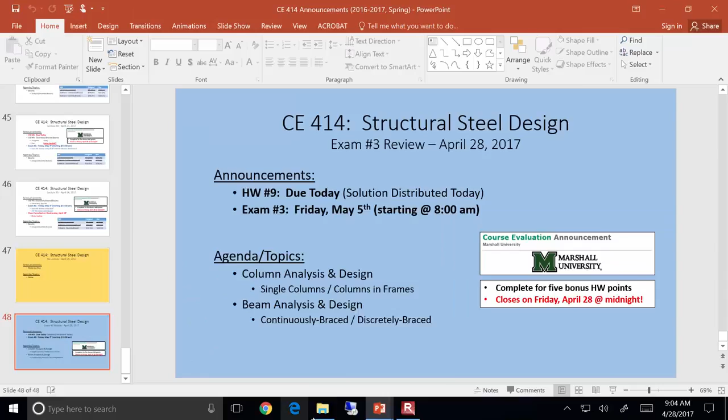Okay, so does everybody have a copy of the Homework 9 solution? If you have not turned it in yet, you need to do that now. I am going to go through the solution so that everybody's aware of what's up. All right, homework 9. What's that?

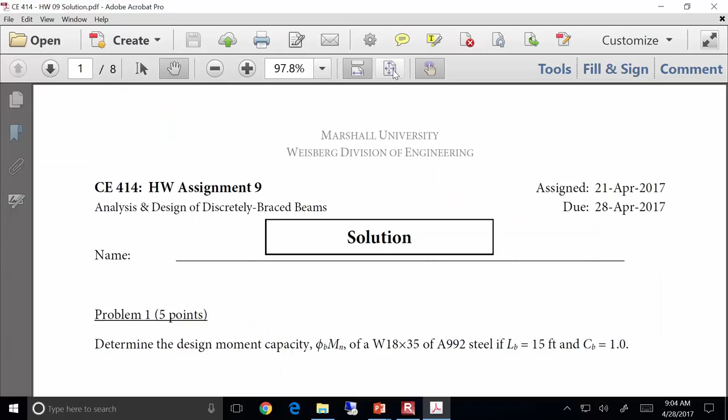Okay, so problem number 1, determine the strength of the following section. Now you look up its LP and LR and find that LR is 12.3 feet and its unbraced length is 15 feet, so you're in zone 3. So you've got to go through and compute the FCR and look up all the properties accordingly. It's a pretty straightforward problem. I know this equation is long, so it just takes a little bit of grunt work. The only thing I'll point out is LB is in inches here because it's inches over inches, so you can't have 15 divided by 1.51. It's got to be 180 so that your units cancel out. You should get 25.18 KSI.

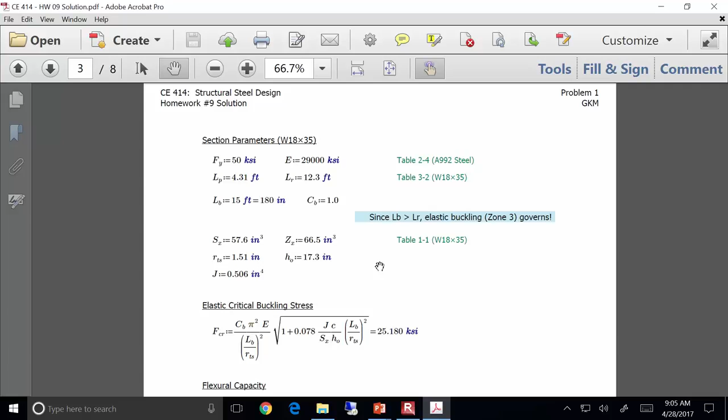Make sure when you do your flexural capacity that you don't forget phi. You have to incorporate your phi value. Now it's the minimum of FCR, SX, and MP, but because CB is 1, you know this one's going to govern. So your nominal moment capacity is 120.9, but adjusted by phi, your 0.9, that's where you get 108.8. So your final answer on problem 1 should have been 108.8 foot kips.

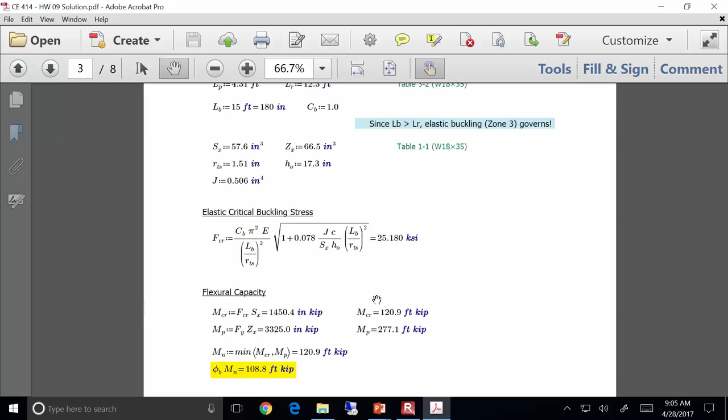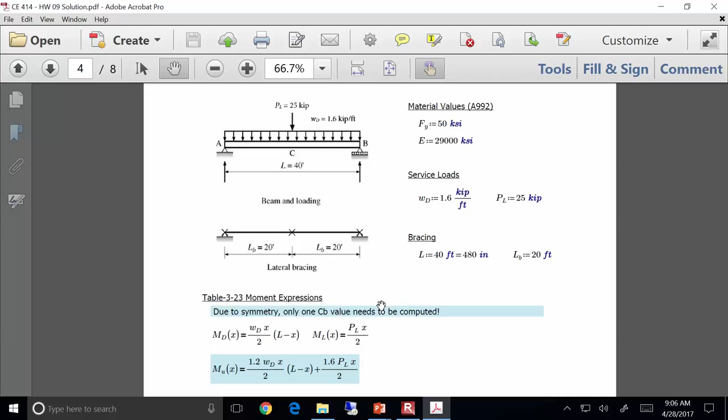So that's problem 1. Problem 2, okay? So here's the deal on problem 2. You have a beam that is subjected to a distributed load and a point load. There was a mistake in regards to the loads being unfactored. If you went ahead and treated them as factored, no big deal. But one thing I am going to make sure of is that regardless of whether you use unfactored or factored loads, that wasn't the difficult part. The difficult part was making sure that you computed your C sub B appropriately.

Now, if you use factored loads, you should have got a C sub B value of about 1.46. If you used unfactored loads, that might have changed a little bit, but shouldn't have changed drastically.

Now, what I did for MA, MB, and MC is I used the equation. For M max, I just used WL squared over 8 and PL over 4. If I had plugged in 20 foot here, it would have given me the same answer, so that's not really a big deal there.

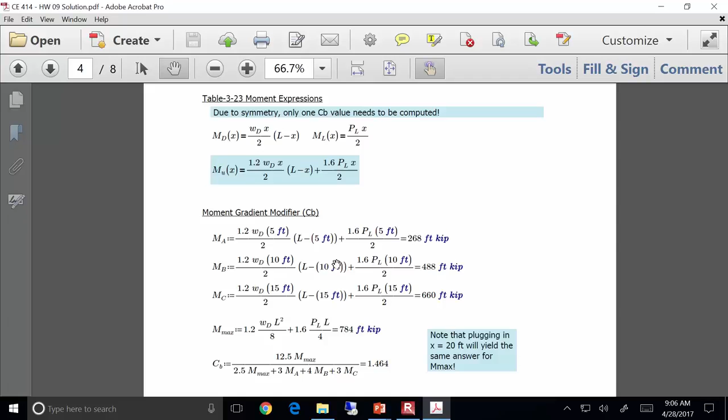So you should have gotten 1.464. Now, your deflection limits will generate a minimum moment of inertia of 1489.7 inches to the fourth.

So you go into your beam charts with MU over CB of 535.7 foot kips and an unbraced length of 20 feet. You're going to try a W27 by 84. You try that because it's a trial, since you have a C sub B that's not 1, you have to go back and check it, okay?

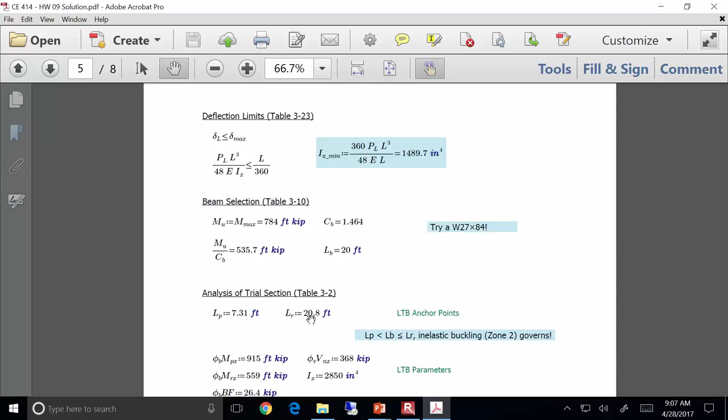So you go through, do your math, and you find that the section does indeed work, and also its moment of inertia is bigger than necessary, as well as its shear capacity, so there's your answer to number 2. Use a W27 by 84.

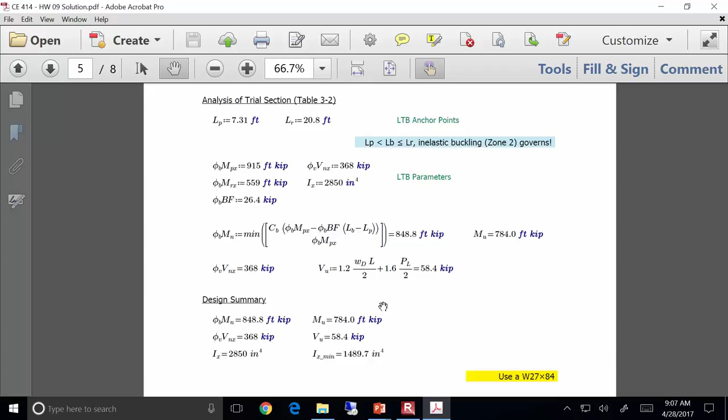Now, number 3. Number 3 is sort of a hip bone connected to the leg bone problem. You have a beam, but the beams are framing the girders. You're analyzing the girders. So here's what should be going on.

So first thing I'm going to do is I'm actually going to analyze the beams. Now, the dead load incorporates the self-weight of the framing, so I don't need to account for that twice. So let's take some time with this.

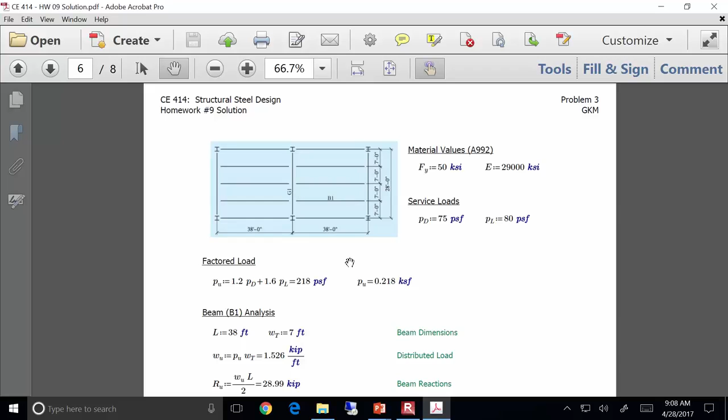So first off, the factored load is 1.2 dead plus 1.6 live, comes out to be about 0.218 kips per square foot.

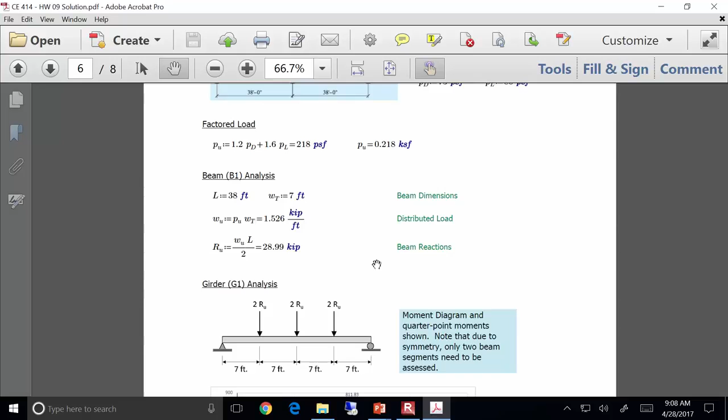Now, if I analyze B1 and just try and determine a support reaction, I get a support reaction of about 29 kips. So looking at girder 1, that model there at the bottom, that's actually the analysis model for girder 1. You have 3 point loads where those beams frame in, and it's 2 reactions. So you essentially have about 58 kips at each point, because if you look right here on this image, you have a beam framing in over here, a beam framing in over there.

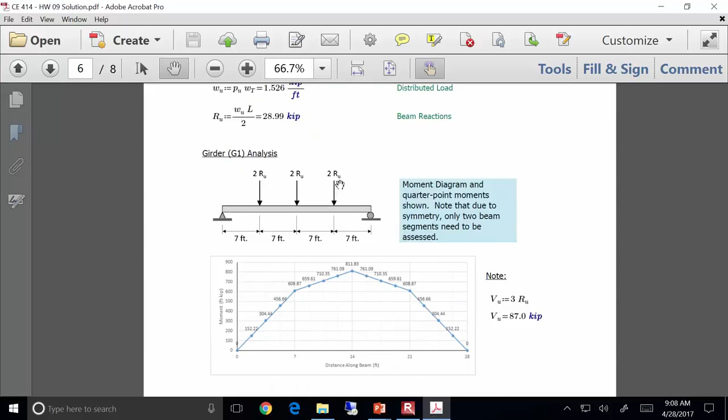So you have 2 reactions, 2 reactions, 2 reactions. So you draw your moment diagram, that's what it looks like.

The reason why I wanted you to go through and do all the CB stuff on this problem is your moment diagram is linear. So your MA, MB, and MC are really easy to find, because if you look at this segment, MB is the average of this and this, so it's that.

MA is the average of this and this, so it's that. And MC is the average of that and that. So you can calculate those intermediate values quite easily. Okay? So your moment diagram should have been linear on 2 ends.

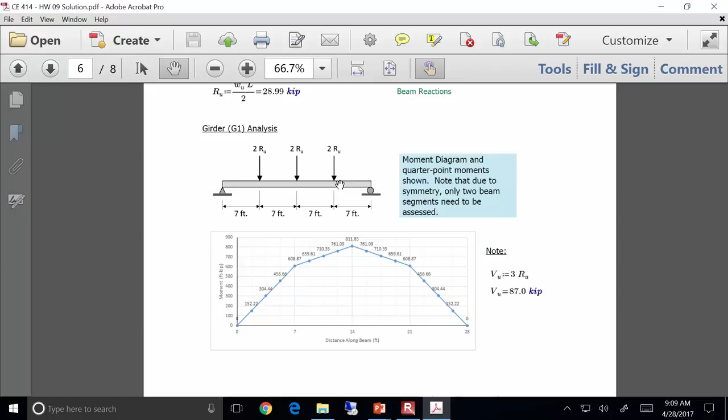What you'll find when you do your C sub B values is this. You have 4 segments on the beam, but the center segments are the same and the end segments are the same. Now, if you look at the center segments, here's what you're going to find.

The center segment has a C sub B of 1.11. The end segments have a C sub B of 1.67. Now, so think about this, in terms of a little bit of a common sense approach.

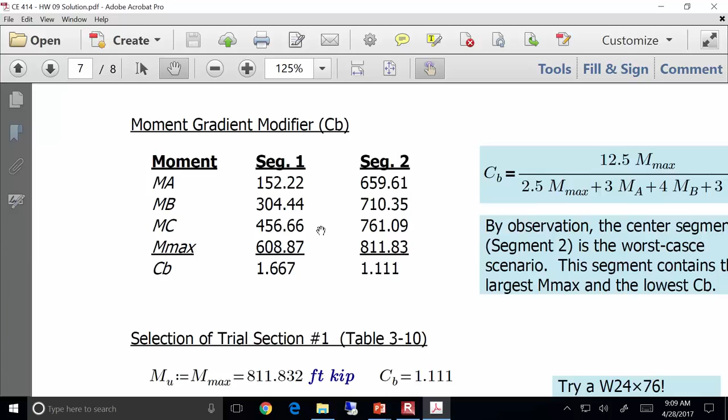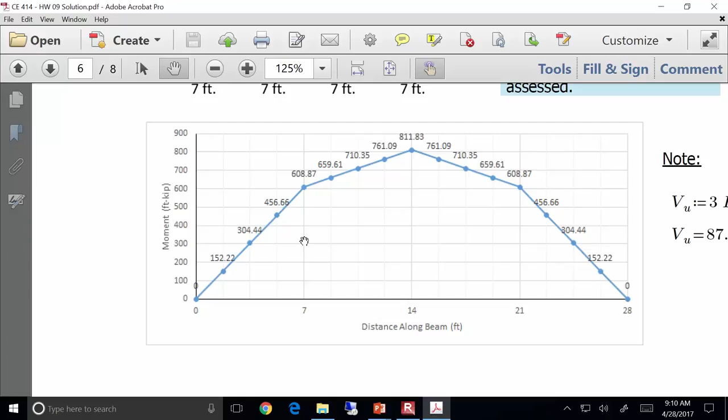This has a lower maximum moment of 608, and it has a higher CB. This one has a higher moment, lower CB. So that center segment governs. You really don't even need to check the end segment because it's not going to govern. It's not the worst case scenario. So you can just ignore everything going on the end segment.

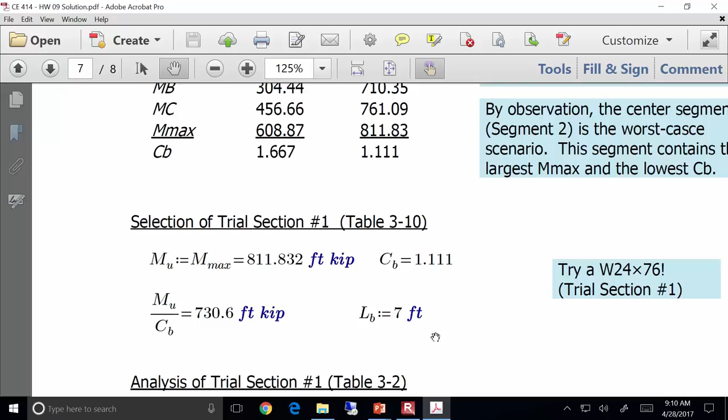For the center segment, you have a M max of 811, a CB of 1.11. So MU over CB is this, unbraced length of 7 feet. Try a W24 by 76. That's what you get out of the beam charts.

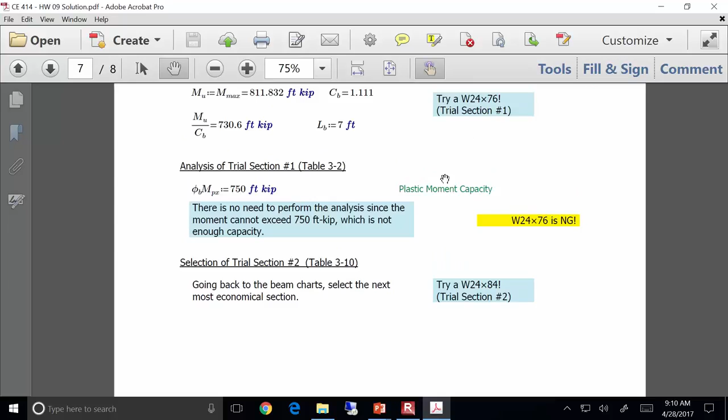Analyze it. You're going to find that it's not good, and here's why. Your actual maximum moment is 811. Okay? It's actually 811.

Now, if you pick your first trial section as a W24 by 76, all I have to do is look at this number and tell you it's not going to work, okay? Because I don't care what math you do, this beam is not going to have a capacity larger than 750, which is lower than our actual moment. So that section's no good.

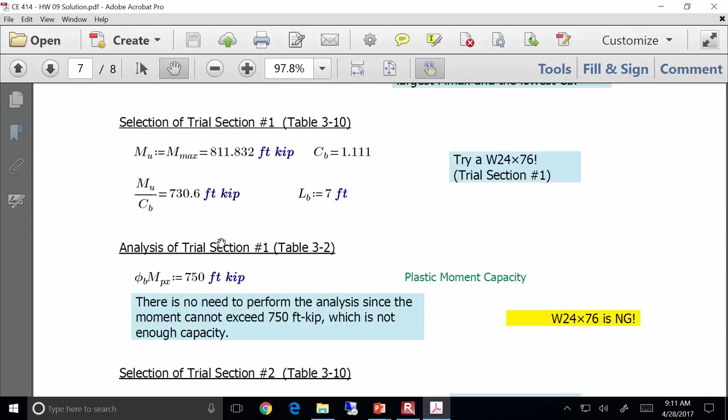So the second section we end up going is the next one up, a 24 by 84. You analyze that one and you find you're good. So that's that. Any questions on that?

Yeah, we did the tributary area and we found a PSF load instead of the load. Your moments actually probably won't be that far off. I mean, I think it was like 840s or something. They should be pretty close, but your moments are probably a little higher, right? So that's what it is.

No, it's because your moment diagram is a little rounded, or parabolic, as opposed to being just straight linear fits. So, yeah.

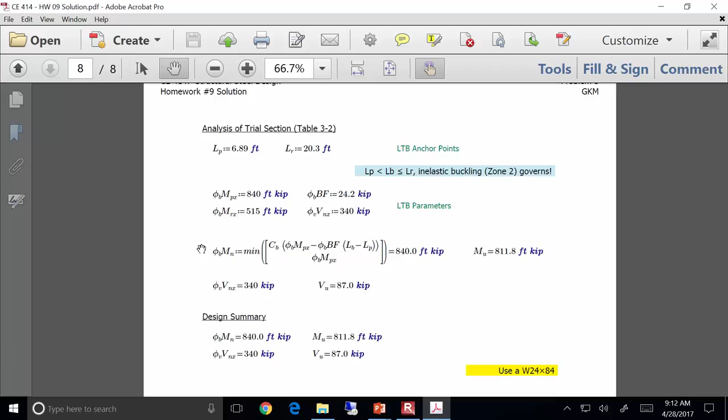Right or wrong is tough to determine on this problem because of the number of beams. I'm going to be hit or miss here. I'll be fine with what you did either way, like if you wanted to use a distributed load, I'll be fine. But let me be clear on something: the reason I'm fine with you using a distributed load is because you have 3 beams framing into this. What if you had 1 beam? That'd be a different story.

Now what if you had 6 beams framing into it? If you remember from when we discussed tributary area in concrete design, the more beams framing in, the more accurate a distributed load approach works. There's usually a trade-off, and it's usually right around 3 beams. So I'm fine with you going with a distributed load. However, it would have been easier and probably a little more accurate to go with point loads, but that's just me. For this problem, I'm hit or miss. But if there were 2 beams or 1 beam framing in, I'd say no, that's not correct.

So the girder doesn't see the distributed load at the problem statement? Does the girder help hold up the distributed load? In the diagram, you only had the point loads for your actions. So would you also have needed to put in the distributed load? Are you talking about the self-weight of the beam? Yeah, like the two distributed loads.

I would say no, and here's why: the dead load on the system was, what was it, 75 PSF? And that 75 includes the self-weight of the framing, right? So if you put self-weight on there, you're double counting. Do you see what I mean? Now, if you're trying to say, well, what about this little piece down here, like if I look at it from a tributary area approach, that part goes there, that part goes there, but then there's that little bit down here. Well, that just goes right to the column and not to the beam or girder anyway, so it really wouldn't matter. Does that make sense? Is everybody else okay with that?

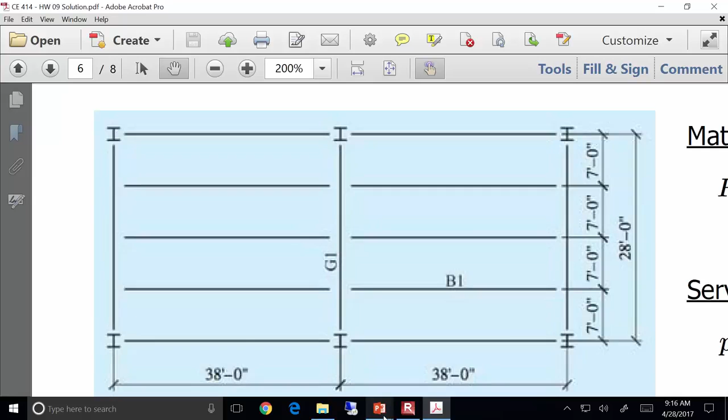Okay, so this is what is going to be on the exam: columns and beams. I would argue there's a fair amount of material on this exam. I've thought about, in future semesters, making exam 2 only worth 15% and making this one worth 25% because there's a lot on here, but I didn't. Okay, the exam, yep, that's concrete.

So yes, there is development. What's that? I will test you on development, just not on Friday.

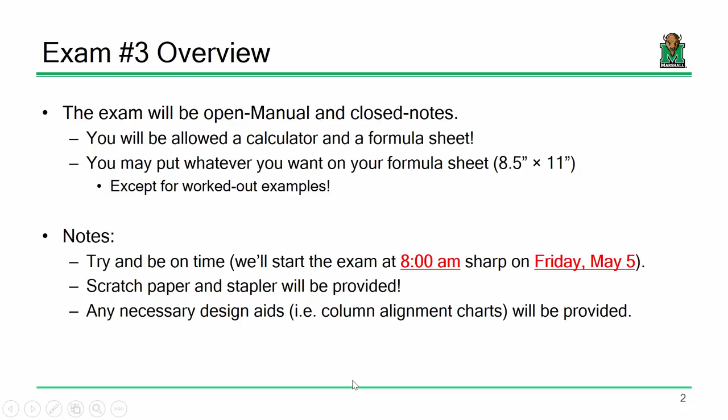So, real quick, scratch paper and staplers will be provided. Any necessary design aids, including the alignment charts for columns, you'll have that. So, let's talk about the material on the exam.

Let's start off with columns. You need to understand the basics and the behavior of columns in general—effective length factors, imperfections and residual stresses, what's local buckling, all that stuff, just the general concepts of columns.

You need to be able to analyze columns using either the column curves, the equations that are in section E3. You need to be able to use table 4.1, and you need to be able to use table 4-22. You also need to be able to select or design economical shapes using table 4-1.

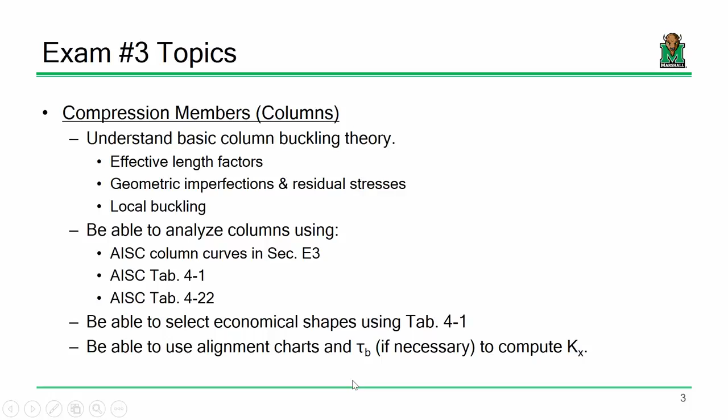Finally, you need to be able to use the alignment charts and Tau B if necessary. Remember, you don't use Tau B on your supports to compute K—in other words, using your alignment charts. So make sure that you're okay on that.

Beams—make sure that you understand basic beam bending and buckling. Make sure that you understand what is the elastic neutral axis and the plastic neutral axis. What's the difference between the two? How do you compute ZX?

How do you compute MP? What is lateral torsional buckling? How does it work? What is moment gradient? What the heck does CB even do?

Be able to analyze and design beams that are continuously braced and discretely braced. Continuously braced beams, you're going to use the ZX tables. Discretely braced beams, you're going to use the beam charts. Also, make sure you can do live load deflection.

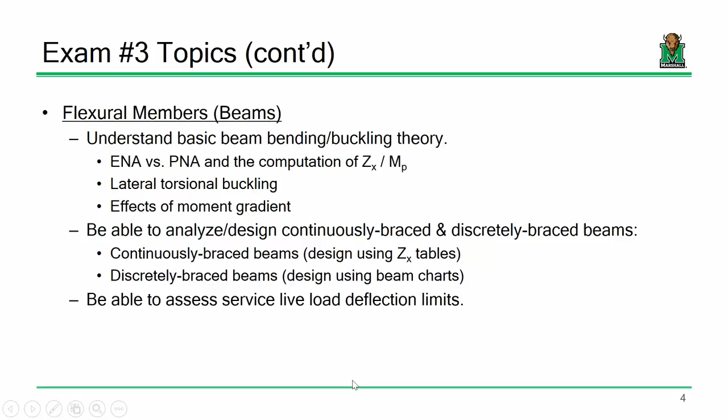I would say shear, but there's really nothing to it. Shear is never a problem, so we really don't need to worry about it.

Here's some stuff in the manual that might help. Number one, table B4.1a, your width to thickness ratios for compression elements and what have you. There's also your ones for columns and for beams, right next to each other in the manual. I've even highlighted the cases that are important to us: case 1 and 5 for columns, 10 and 15 for beams.

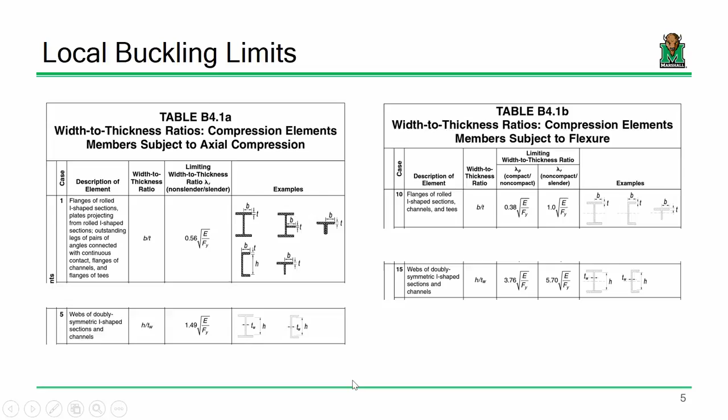Effective length factors—make sure you know how to use the theoretical values. Use the recommended ones for design purposes.

Make sure you understand your column curves—that you understand the equations and how to compute Fe, how to compute FCR for inelastic buckling and elastic buckling, and how you tell the difference.

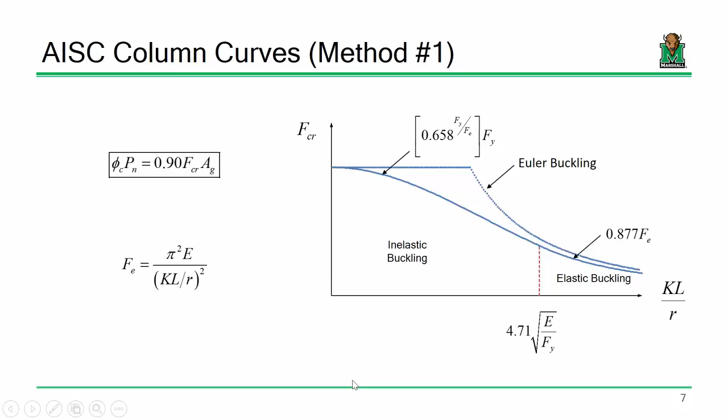Make sure that you can understand how to use table 4.1, the column capacity table. Remember, you go into the chart with one of two things, either KL for the y-axis or an effective KL for the x-axis.

Your RX over RY ratio is at the bottom of the table. Remember, we're looking up blue numbers, not green numbers.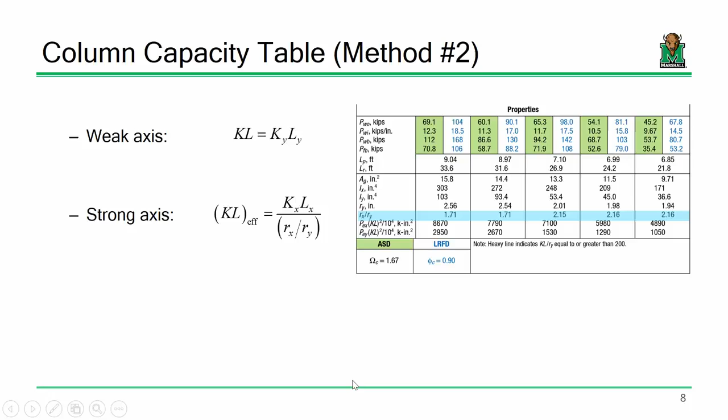Alignment charts: remember, your G value is the sum of I over L for the columns divided by the sum of I over L for the girders. G for a fixed support is 1, and for a pin support it's 10.

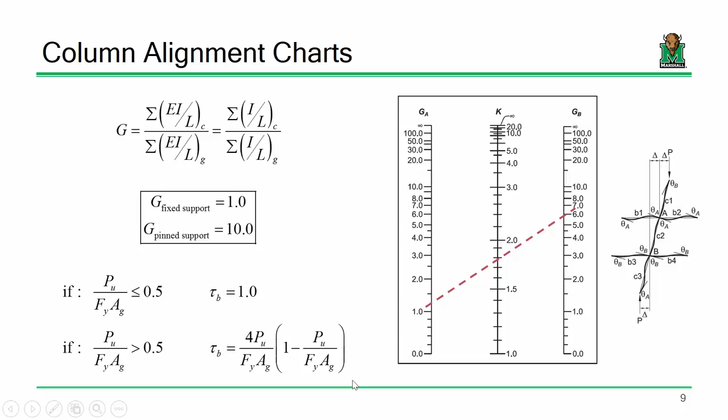Your K value is computed as follows: locate your G value on one side and your G value on another, strike a line, and that's your K value. I don't care if the exact answer is 1.86 and you get 1.85 or 1.87, that's no big deal. But if you get 3.94, that's going to be a problem. Make sense? All right.

Beam analysis aids: make sure you understand how to use these. It would probably not be the worst idea to put some of this on your formula sheet. I'm not saying you need to write every one, but if you don't know WL squared over 8 by now, you should be pretty comfortable with that one.

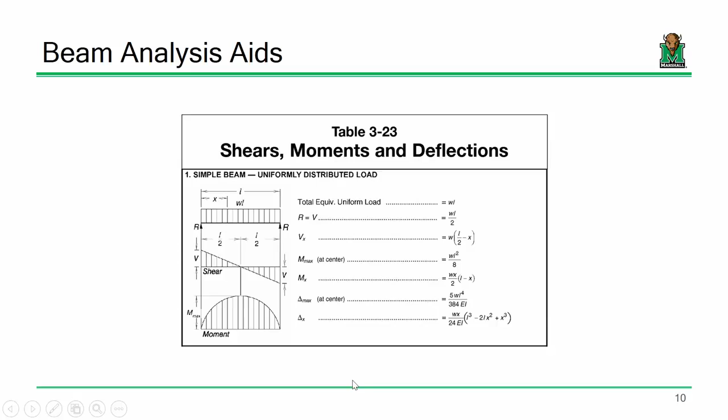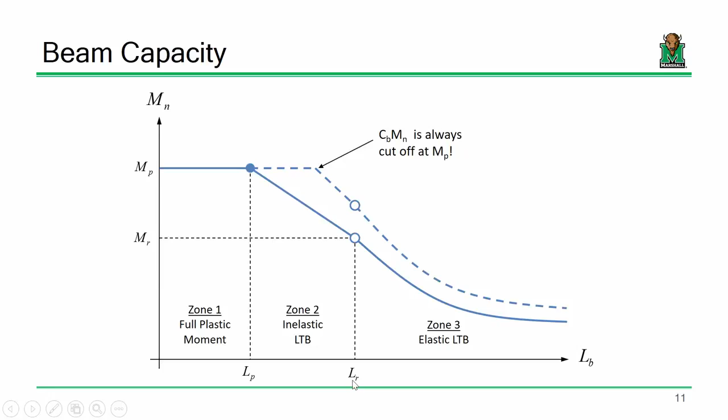Make sure you understand your beam capacity curve. The idea is you have 3 zones: full plastic moment capacity, an inelastic buckling region, or an elastic buckling region. If you have a continuously braced section and LB is 0, your capacity is just MP. Remember, C sub B serves to increase your moment capacity, but I don't care what C sub B does, you're always cut off at your plastic moment at MP. Make sure you understand that.

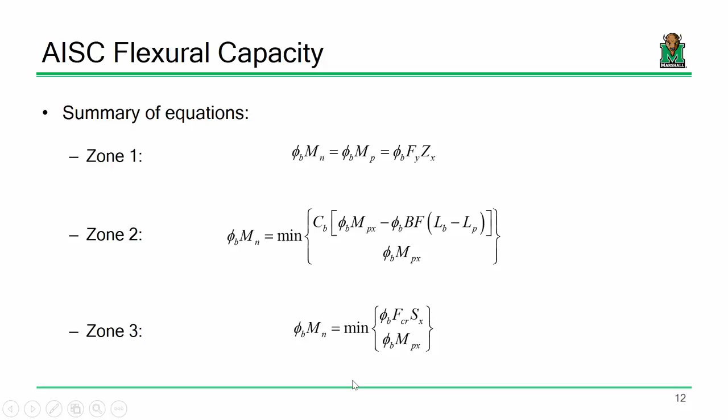Your equations: zone 1 is phi Fy ZX; zone 2 is that linear fit, the minimum of that and phi MP; zone 3 is phi F critical SX or phi MP, whichever is smaller. C sub B is calculated as follows, and you can also find that in table 3.1. FCR is computed using that equation, and the rest of the factors you can find in table 3.2. So you should be good to go.

And that is exam 3. So with that, I am going to shut up and let you ask whatever you want.

You mean making you do structural analysis? We done passed. So there's not going to be any class tomorrow, but that was this class, right? That was this class.

Hence why it's a good idea to have the concrete exam on Monday and this exam on Friday. Now, as for structural analysis, if you go to page 1 of the syllabus, it lists the prerequisites for this course, and one of the prerequisites is structural analysis.

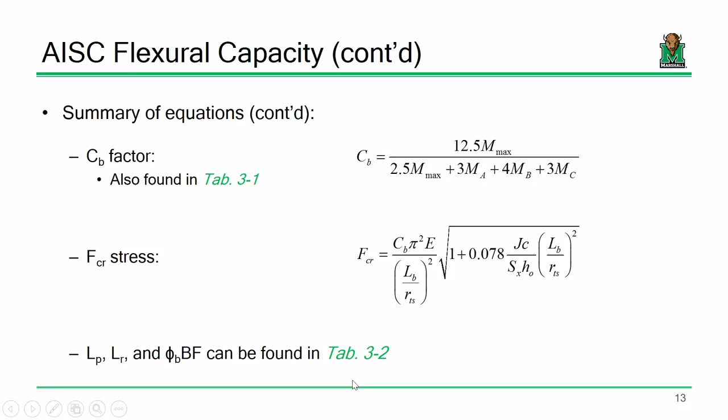I do not expect anybody to be going down to the wire. By their very nature, column problems and beam problems may be a little longer, but it is not my goal to take the exam and make it longer because I've got more time. I don't expect anybody to have to call the clock on them, and if I do, maybe a couple of you, not everybody.

So that's my prediction. I've given similar exams before. I'm not a time cruncher guy, that's not the type of exam I like to give. My thought is I'd rather give you all an exam where time isn't an issue, because I just want to see whether or not you can do the math, or the algebra.

That's a calculation error. Look, I'm an equitable guy. My opinion is, however vital that calculation is to the problem is how much it's worth. But I'm not of the opinion that even if you have all the right input and it's just a plus where a minus should have gone, that's worthy of 10 points off. So don't worry about that. I'll treat calculation errors like I always do.

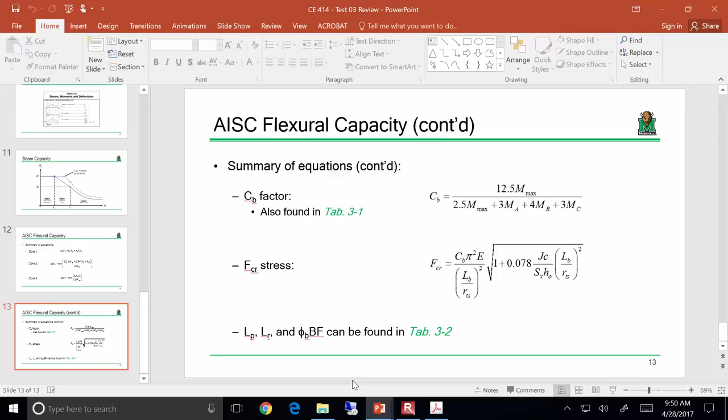Oh, stop with that. Stop with that.